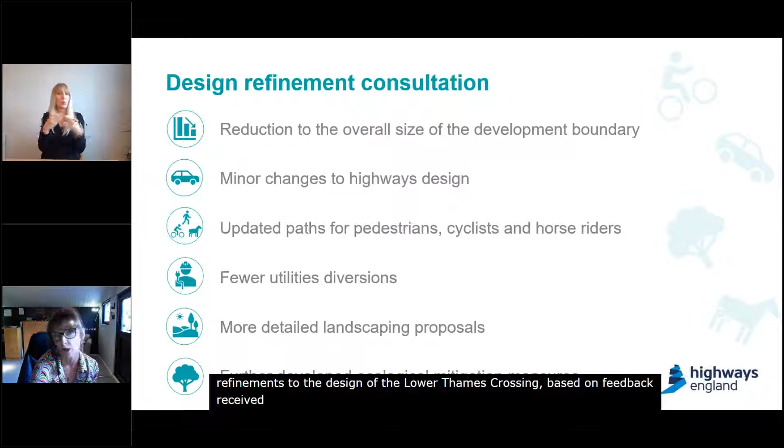We're proposing a number of refinements to the design of the Lower Thames Crossing based on feedback received during previous consultations, engagement with our stakeholders, and ongoing design work. We've now also got a better understanding of some of the technical constraints, including new information about existing utilities. The proposed refinements include a reduction to the overall size of the development boundary, minor changes to highways design, updated paths for pedestrians, cyclists and horse riders, fewer utilities diversions, more detailed landscaping proposals, and further developed ecological mitigation measures.

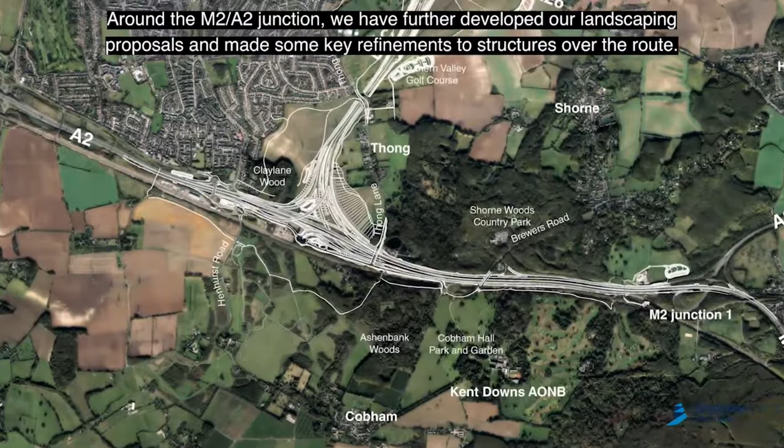Around the M2-A2 junction, we further developed our landscaping proposals and made some key refinements to structures over the route. Over the A2, Brewers Road and Thong Lane, green bridges would be slightly realigned to combine green spaces at each location and provide better connectivity for the landscape, ecology and habitats.

We're proposing a new electricity switching station at Thong Lane. This would be required to distribute electricity to all new and existing smaller substations along the Lower Thames Crossing route. The position of the Lower Thames Crossing to the south of Thong Lane would also be raised between 2 and 3 metres to improve driver visibility.

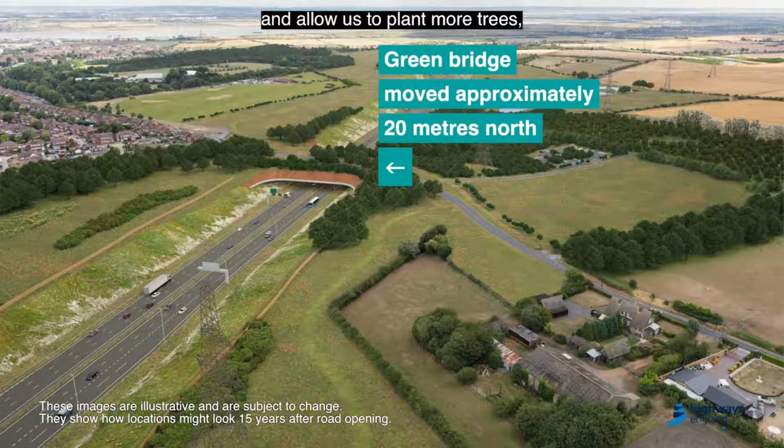Thong Lane Green Bridge over the Lower Thames Crossing would also move approximately 20 metres north to avoid clashing with a proposed gantry and allow us to plant more trees, something that was previously restricted by overhead electrical cables. The bridge would also be raised by less than half a metre due to the Lower Thames Crossing carriageway realignment.

We're proposing a new informal parking area to the east of Thong Lane. This would help ease the current parking issues along Brewers Road and help increase capacity for those visiting Shorne Woods Country Park. We've also refined and updated our proposals for new walking, cycling and horse riding paths in the vicinity of the Lower Thames Crossing.

We've carried out detailed noise assessments and have identified locations along the route where noise barriers could be used to reduce the sound of traffic for local communities. Further details on these proposed locations of the noise barriers can be found in our consultation documents and maps online and in our virtual exhibition.

These are just some of the design refinements we're consulting on. To view and comment on all the latest proposals, please visit the Lower Thames Crossing website, explore our online exhibition, and of course follow us on Facebook and Twitter for updates.

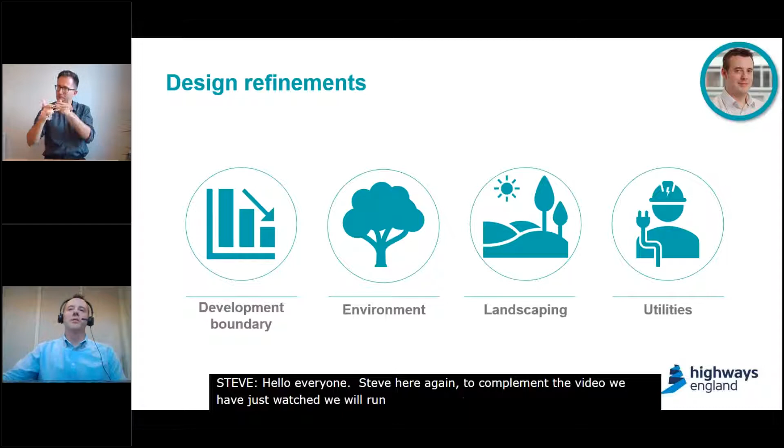We'll start off by covering some key themes regarding the development boundary, environmental impacts, landscaping and utilities. Then we'll dive into the refinements on a junction by junction basis, starting with the development boundary.

On screen now is the development boundary map. We've been able to reduce the amount of land required by 12.5% by refining and designing the utility diversions in some areas along the route. Within this revised development boundary, there's now some additional land that would be required permanently, whereas other areas, like construction sites, will only be needed temporarily, with any land being reinstated and returned to its owner once construction is complete.

If your property is affected by the scheme, you should have been written to already. If you have received a letter, please feel free to give us a call to discuss it on 0300 123 5000. That's 0300 123 5000.

Okay, on to environmental impacts now. Following feedback from our supplementary consultation, we've been able to refine the land required for utility diversions shown at supplementary consultation, and in doing so, we've been able to reduce the impacts to various wooded areas, particularly in the areas around the M2 and A2 junction.

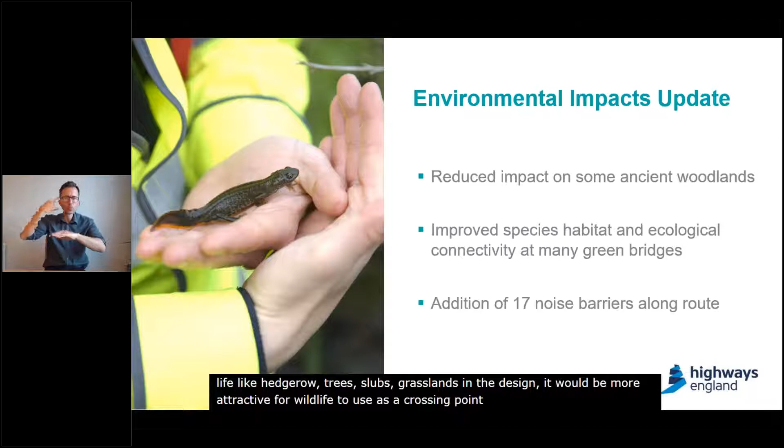And finally, noise barriers. To help mitigate noise, we've introduced some noise barriers in areas where higher noise levels and disturbance are anticipated.

Onto landscaping. As we've progressed the design of Lower Thames Crossing, we've also developed more detailed landscaping proposals to mitigate the visual impacts of the project's above ground infrastructure. Since supplementary consultation, we've added more detail on the specific type of ecological mitigation proposed across the route, such as grassland, woodland, and further refinements around watercourses. We also provide updates on new landforms and some proposals for new viewpoints.

Turning now to utilities, we've continued to refine our proposals for utility diversions across the route and are now proposing some further changes to the position presented at supplementary consultation. Some of the more notable updates include the need for small substations along the route, as well as a switching station near Thong Lane Green Bridge over the A2, which I believe Sarah pointed to earlier in her presentation.

The substations will be approximately 3 meters wide by 3 meters long and about 2.5 meters in height. The number and location of these substations will be confirmed following further design work and continued engagement with our stakeholders.

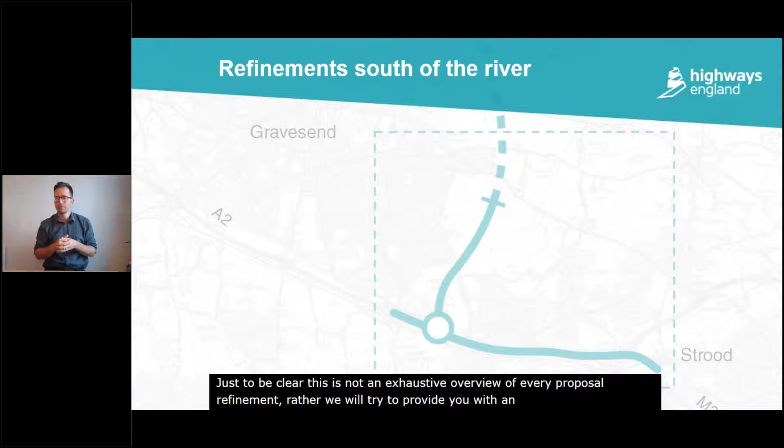Okay, let's now dive into some of the refinements south of the river. Just to be clear, this is not an exhaustive overview of every proposed refinement. Rather, we're going to try and provide you with an overview of some of the more notable refinements made to our proposals since we last consulted at supplementary consultation earlier this year.

On the screen right now is an image depicting the M2/A2 junction as we presented it at supplementary consultation. Now we'll show what we're proposing for this design refinement consultation, and we'll switch between the two, so hopefully you can see the differences.

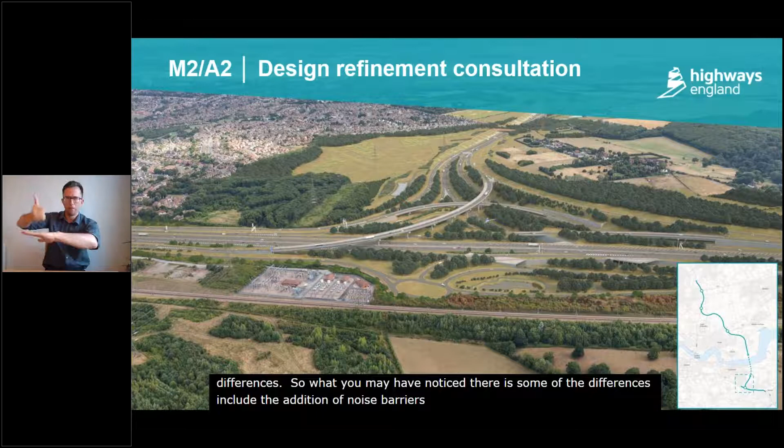What you may have noticed there is that some of the differences include the addition of noise barriers, a change to utility diversions, and, probably more notably, changes to our planting proposals. We'll go into that in more detail next.

Moving now to Thong Lane Green Bridge over the A2, the green space is just out of view on this image, but the green space will be amalgamated on one side of the bridge to improve the landscape and ecological connectivity.

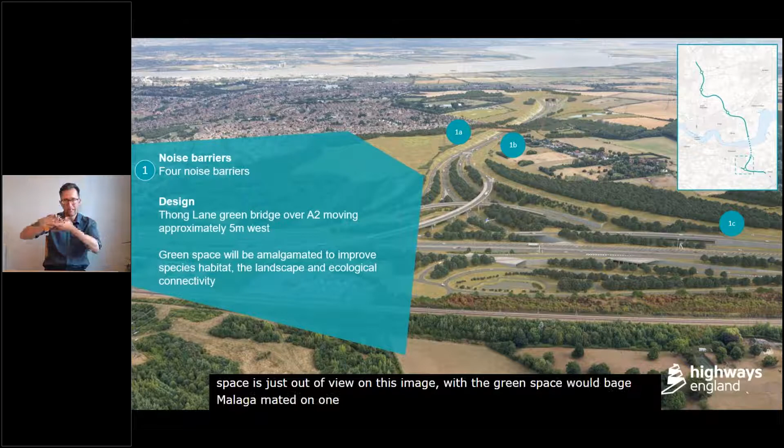Due to utility diversions required within Clay Lane Wood, the ancient woodland compensation in this area will be reduced, and as a result, we would increase the proposed ancient woodland compensation planting to the north on the edge of Gravesend as much as is reasonably practical. Landscaping in Brewers Wood and Great Crabbles Wood areas would be designed to connect both woodlands and propose replacement open space land.

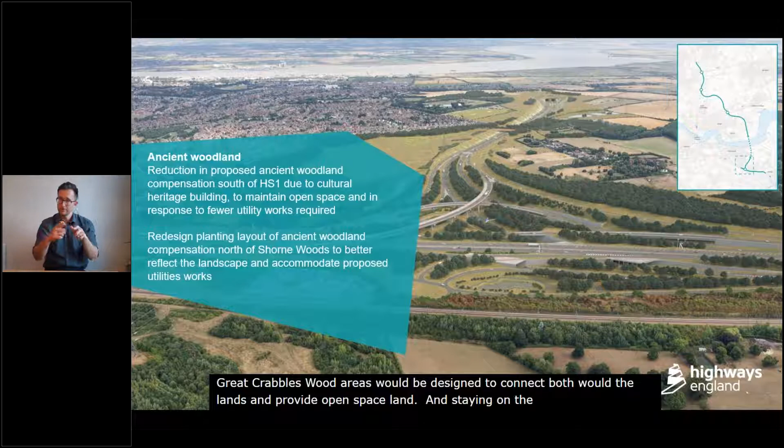Staying on the subject of woodlands, at Shorne Woods we've redesigned the block planting layout to better reflect the landscape and accommodate the proposed utility works. We've also reduced proposed ancient woodland compensation to the south of High Speed 1 railway due to a cultural heritage building and to maintain open space setting. This is due to the fact that fewer utility works are now planned in this area.

Moving on to utilities, a new switching station is required to distribute electricity to all new and existing smaller substations along the Lower Thames Crossing route. We're currently working with the utility company on the final design that we submitted as part of our development consent order application.

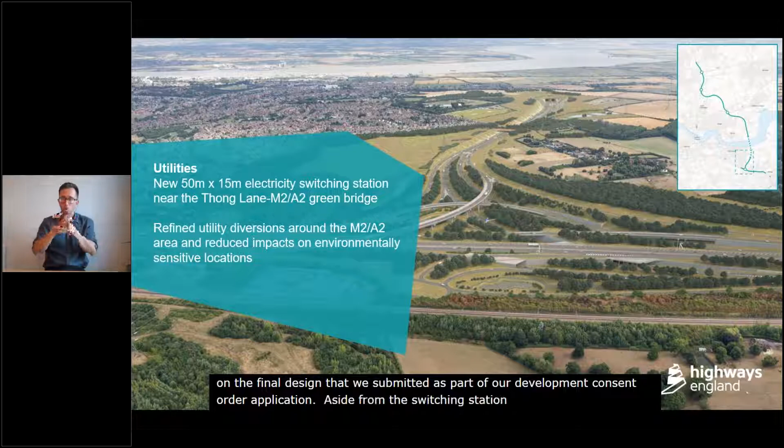Aside from the switching station in this area, there are also a number of proposed overhead power line diversions and upgrades in the area of Riverview Park and Thong Lane, as well as a short extension to a gas diversion along Valley Drive. We've been working with our stakeholders, including utility companies, to refine our proposals and minimise the land required for works. This in turn reduces impacts on environmentally sensitive locations.

So now we'll take a particular focus on refinements made in the Thong Lane Green Bridge area. This is over Lower Thames Crossing.

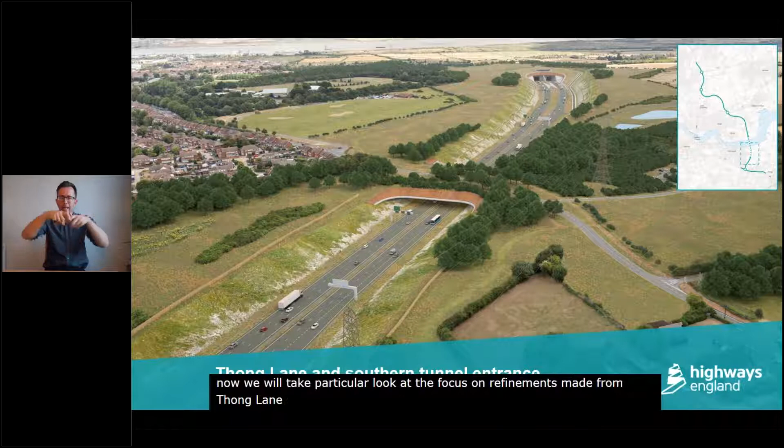In terms of design, Thong Lane Green Bridge over Lower Thames Crossing is moving 20 metres north to avoid clashing with the proposed gantry and to allow for tree planting that was previously restricted by overhead power lines. The bridge would also be raised by around half a metre as a result of an alignment change. You can see this represented by point 1 on the image.

We're also proposing that Lower Thames Crossing will be raised south of Thong Lane Green Bridge to improve driver visibility. This is shown as point number 2 on the image.

Moving on to utilities in this area, as shown on the image as point 1, we plan to have a substation located behind the southern tunnel entrance. Our landscaping proposals around this substation will help to integrate the infrastructure into the existing landscape and to mitigate the visual impact.

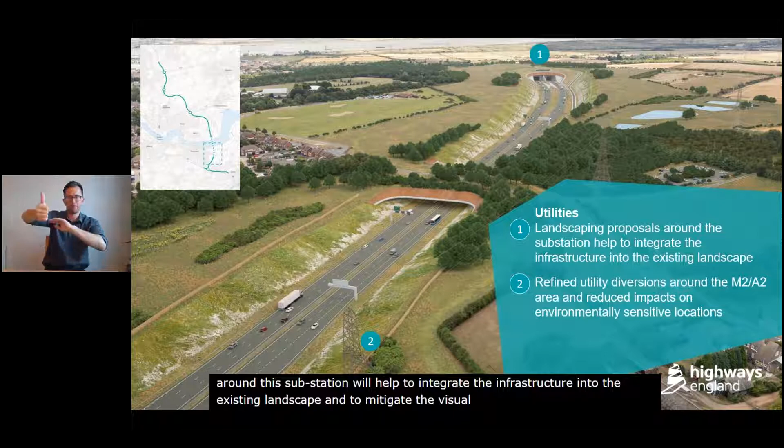We've also refined utility diversions in the area, as shown by point 2. Due to the proposed changes to Thong Lane Green Bridge over Lower Thames Crossing, we're seeking to move the overhead power line diversions in this area by around 235 metres to the south. This means it will move away from Riverview Park and closer to Thong.

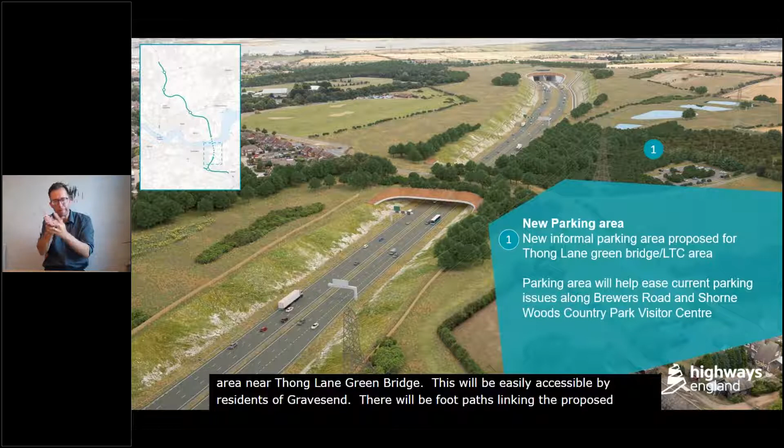As shown as point 1 on this image, we've added a new parking area near Thong Lane Green Bridge. This will be easily accessible by residents of Gravesend. There'll be footpaths linking the proposed parking area to Shorne Woods. The new paths remain as shown in our proposals at supplementary consultation, which you'll see in the subsequent slide.

Taking a look at changes to paths in the area, as a result of the Thong Lane Green Bridge over Lower Thames Crossing moving 20 metres north, the shared path on this bridge has also moved, and this is reflected on the map in purple colour.

So I'm just going to recap now on the refinements we've just covered. The map on screen is also included in your guide for those of you who've got it, on pages 26 to 27 and 28 to 29 of the Design Refinement Consultation Guide.

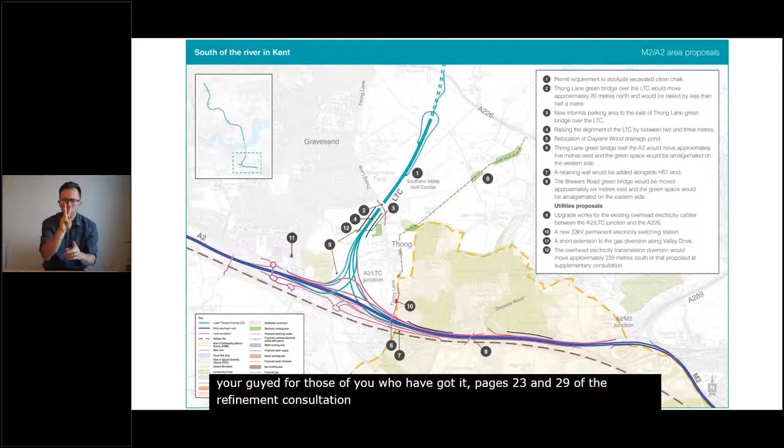Number 2 on screen is the Thong Lane Green Bridge over Lower Thames Crossing, which has moved 20 metres north. Number 3 is the informal parking area to the east of Thong Lane Green Bridge. Number 4 shows where the alignment of Lower Thames Crossing has been raised south of Thong Lane Green Bridge over Lower Thames Crossing.

Points 9 through to 12 help to show the utility upgrade works for existing overhead power lines. Point number 10 shows the location of the proposed new 33 kilovolt permanent electricity switching station off Thong Lane near the M2/A2.

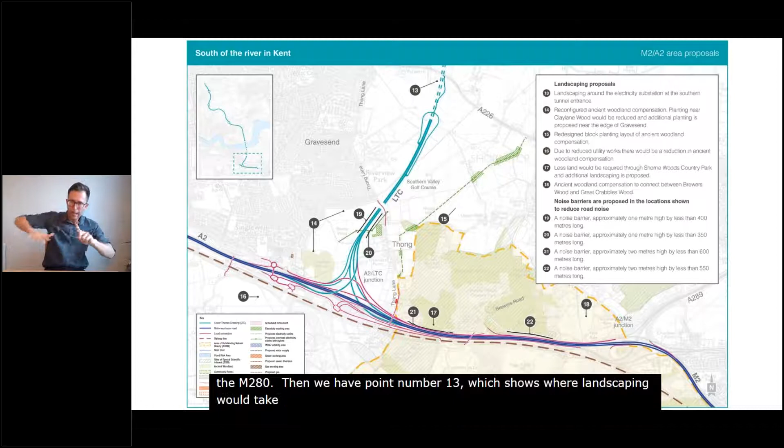Point number 13 shows where landscaping would take place around a proposed substation. Points 14 through to 18 help to show where we're proposing to reconfigure woodland compensation. Finally, points 19 through to 22 show where we propose to place some noise barriers as part of our noise mitigation strategy.

Thank you, Steve, for that run through of the proposed refinements to the route. As was mentioned at the very start of this webinar, our goal today is to provide you with an overview of some of the more notable refinements made to our proposals since our last supplementary consultation.

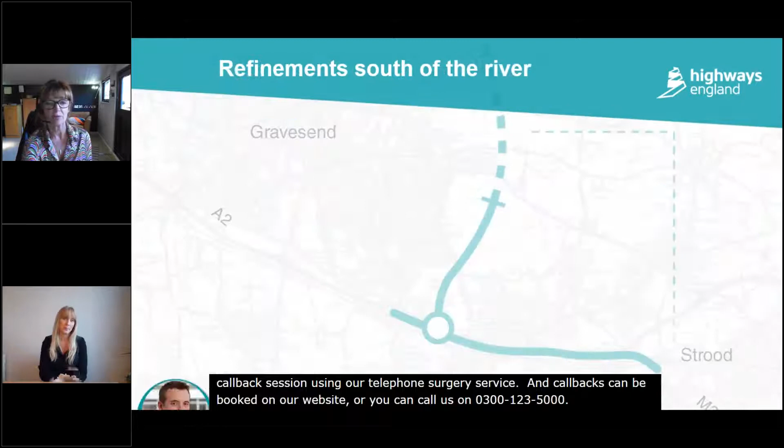Okay, so we're going to be focusing today's Q&A session on areas of the Lower Thames Crossing proposals that are south of the river. We're going to begin with our first question, and we've had a couple of questions come in about the changes in the refinements in the Thong Lane area. Steve, this might be one for you: why has LTC been raised up where it crosses Thong Lane?

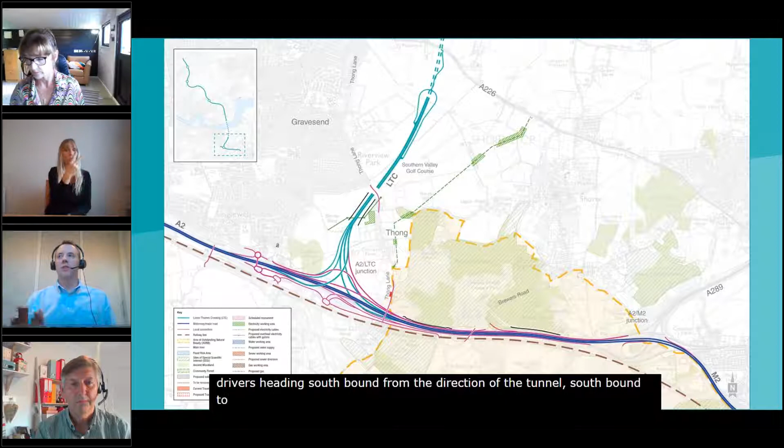Okay, yeah, sure, I'll take that. It's principally to improve visibility for drivers heading southbound from the direction of the tunnel, southbound to join the A2. It's to improve the vertical alignment and the forward visibility for drivers. So the road LTC will still sit within quite a deep cutting at this point, and there will also be some noise barriers alongside Lower Thames Crossing for that stretch of the route.

And there's another question connected to this one: why has the Green Bridge been moved further north? This person has asked — they're concerned about it opening them up to more noise and air pollution, they're saying. Right, sure, yeah, it's interconnected.

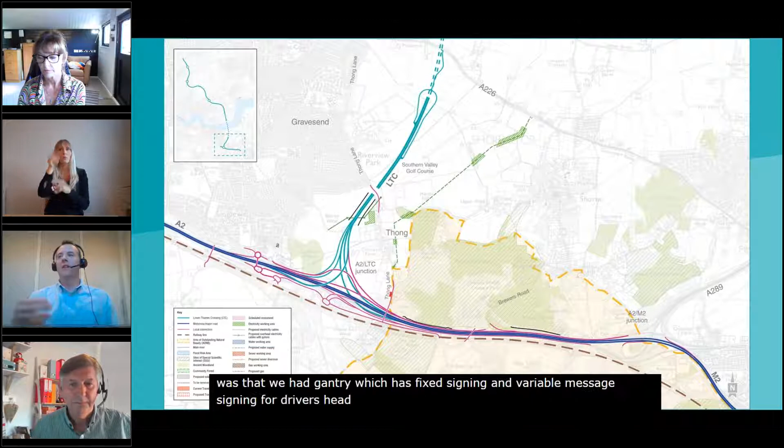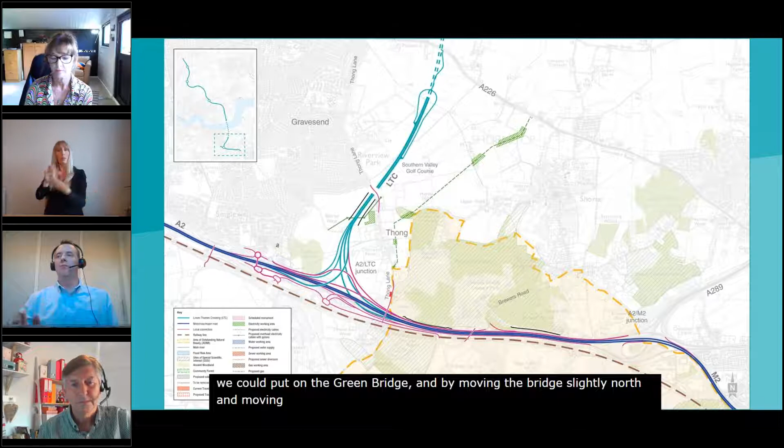So one of the main reasons was that we had a gantry with fixed signing and variable message signing for drivers heading northbound towards the tunnel, and there's a set distance back from the tunnel that the gantry has to be. Unfortunately, it was very close to the position of Thong Lane Green Bridge, so we decided to move the Green Bridge. That also helped us with the alignment change I was just talking about, so there was a benefit there. The other benefit it gave us was it allowed us to reconfigure the power line diversion, which was previously restricting some of the planting we could put on the Green Bridge. By moving the bridge slightly north and moving the power line diversion south, it enabled us to provide better planting on the Green Bridge itself. So there were a number of benefits, and the two issues were interlinked: the visibility for the alignment change, and moving the bridge for the gantry.

Thank you for that, Steve. Clearly, some of the refinements in the Thong Lane area are attracting some interest.

Gary, we've had quite a few questions about the parking area on Thong Lane, asking why it's needed, who's going to look after it, and who's responsible if there are things like fly tipping or trespassers. Gary, can you help with that?

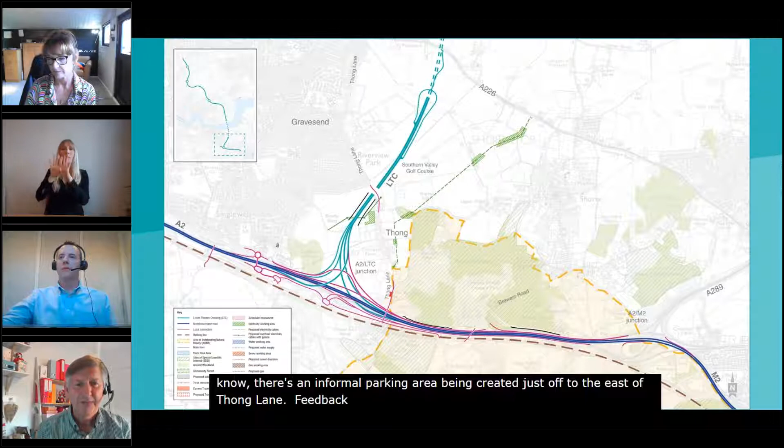Yes, of course. As we pointed out in the video earlier, there's an informal parking area being created just off to the east of Thong Lane. Feedback from stakeholders told us about particular parking issues on Brewers Road, so we thought this was an opportunity to help out with access to Shorne Woods Country Park and the visitor centre. The parking area will provide another point from which to explore the local area.

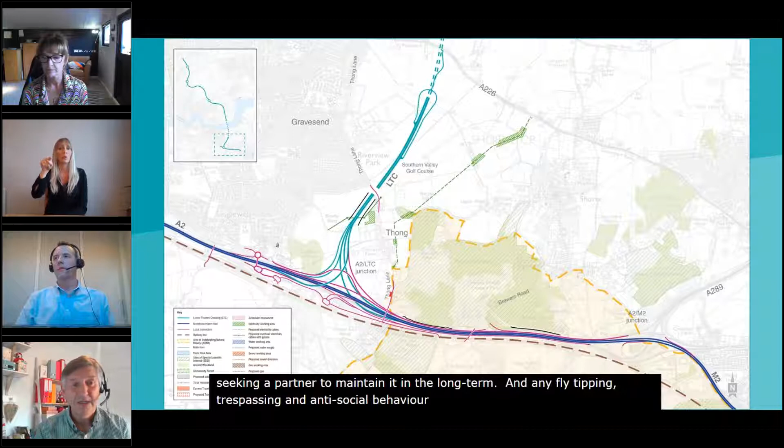The intention is that it's going to have around 50 car parking spaces. It'll initially be owned by Highways England, but we will be seeking a partner to maintain it in the longer term. Any fly tipping, trespassing, or antisocial behaviour should really be reported to Gravesham or Highways England - that's how we're looking at it being managed initially. It will be an informal area, designed not with tarmac but with gravel, being sympathetic to the area it's set within.

Thanks for that, Gary. We've had a question come in, which I might answer. It's about working and social practices that have emerged from the COVID-19 pandemic changing everybody, including easing some of the traffic flows on other Thames crossings. We're being asked whether that's going to change any of the economic benefits that the Lower Thames Crossing might bring, and asking, is there a budget for the works that the public can see?

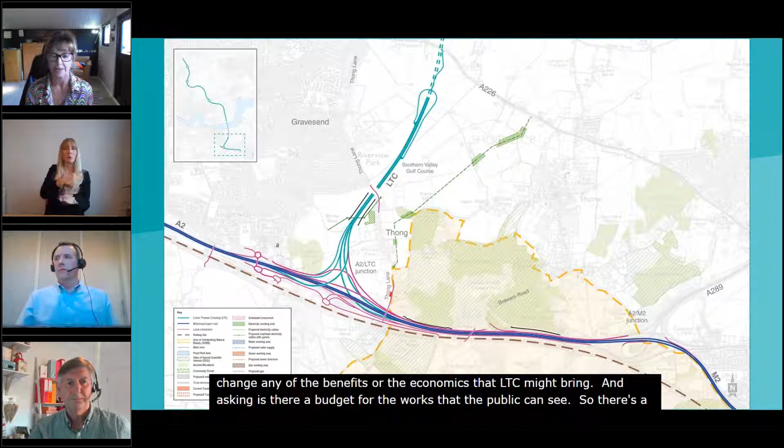There's a couple of things I can probably help with there. We know COVID has had a huge impact, and it's had an impact even on the way we're consulting at the moment. Some of the impacts on traffic levels have been a short-term, quite significant impact, but it's one we foresee changing and returning to normal over time. The Dartford Crossing is still the only way of crossing the Thames east of London, so COVID or no COVID, there's still a very strong business case for building the Lower Thames Crossing, which will almost double road capacity across the Thames east of London, creating that new connection and bringing economic benefits to both Kent and Essex and beyond.

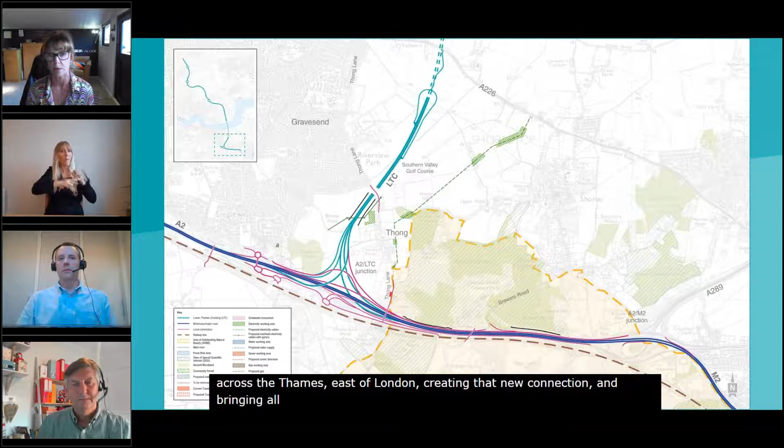In terms of funding, the development phase of this project, which is the phase we're in at the moment, is fully funded. What happens then, and this is completely normal, is we will seek full funding once we get permission to build the crossing. So I hope that helps the person who asked that question.

Steve, I think there's a question come in now which perhaps you might be able to help with. Someone said they've got a general interest in the success of the scheme and also its impact on the local environment and its wider transport implications. Is there some more detail you can add around that, Steve? Okay, sure. Well, yeah, thank you for your interest.

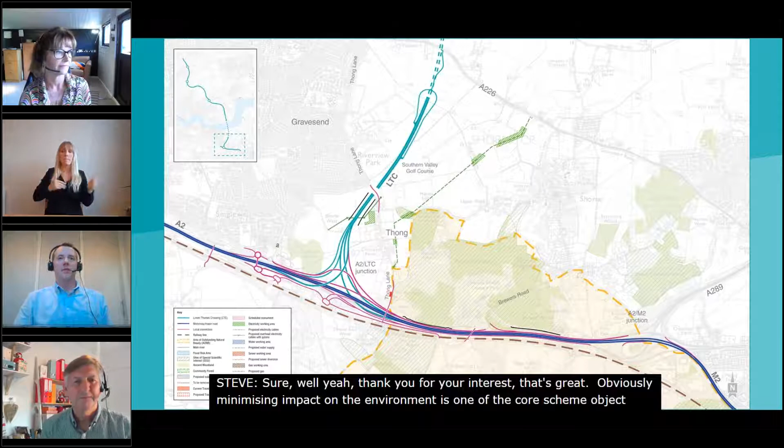That's great. So obviously minimizing impact on the environment is one of our core scheme objectives. There's quite an extensive update on the environmental impacts, which is on our website.

So if you're particularly interested in the environmental side, there's quite a lot of information there specifically pertaining to this design refinement consultation. Some of the highlights, I suppose - reduced impact on Shorne and Ashenbank Woods by refining our plans for utility diversions. That's quite a key theme, improvements and more refinement in our utility proposals, which has had some positive benefits to the environmental impacts.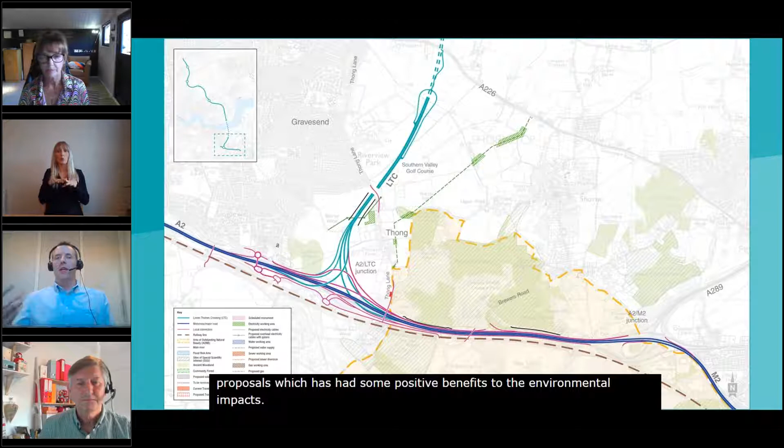Better connectivity for non-motorised users, so for walkers, cyclists and horse riders - there's been some enhancements in our proposals there. And some better definition on planting and landscaping proposals, and noise barriers. We haven't previously consulted on noise barriers, but we have got some more information to share on those now. So there's quite a lot in the environmental arena, and yeah, thank you again for your interest.

Thanks, Steve. Gary, a question for you now. Quite a local question from the Cobham area, asking how will these changes affect the Cobham parish, the boundaries of which stretch all the way to Ifield, Meopham, and Luddesdown. Can you explain how the changes might affect those places like Luddesdown and Cuxton?

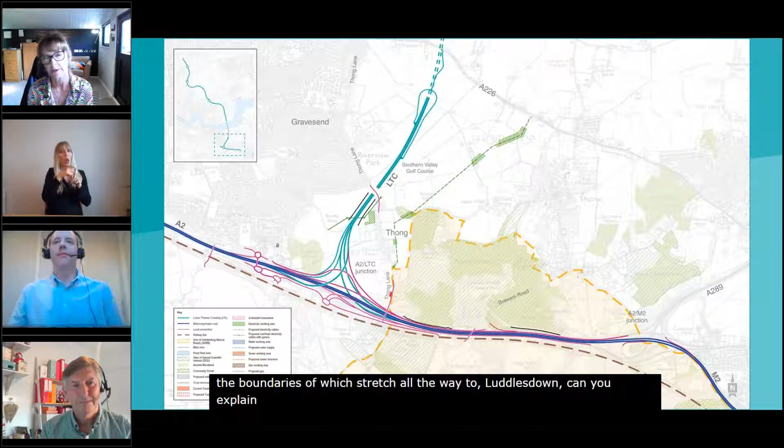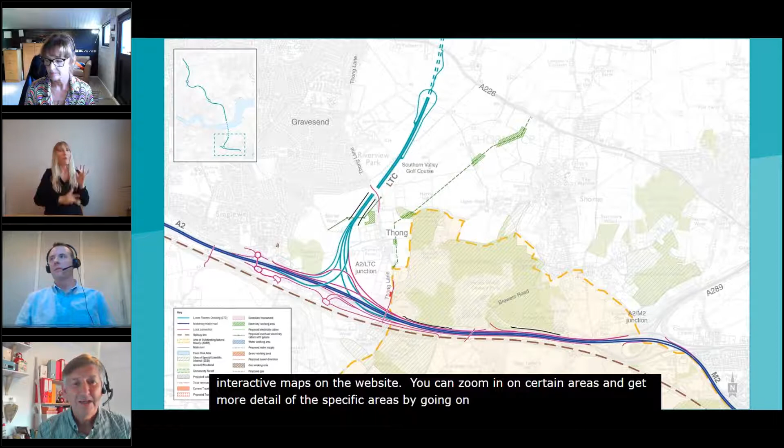On the south side of the HS1, one of the biggest things we've done is reduce the temporary land take because of the work we've done with the utility companies. We've most probably covered some of these points already in the webinar, but please do look at the guide, particularly the interactive maps on the website, where you can zoom in on certain areas and get more detail. None of the refinements in this consultation have had any different impacts to what we had at supplementary consultation, particularly at Luddesdown or Cuxton.

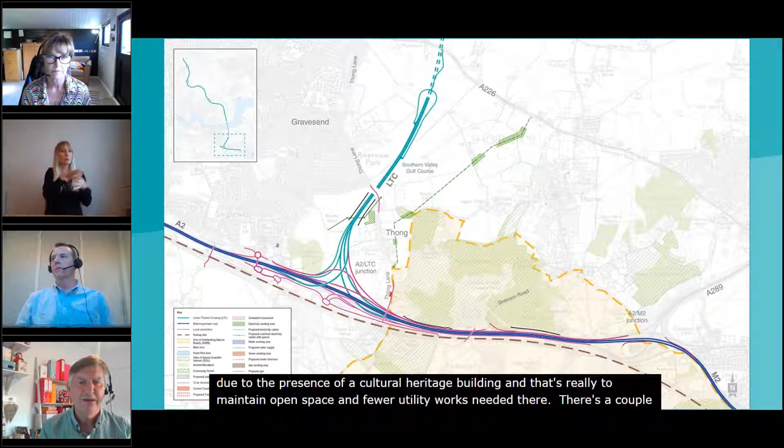South of the high speed line, we've reduced the ancient woodland compensation near Henhurst Road and Church Road due to the presence of a cultural heritage building, to maintain open space and reduce the utility works needed there. There's also a couple of substations near the common service area, 3 metres by 3 metres in size, within an area of 5 by 4 metres. Overall, south of HS1, there have been a lot of improvements because we've got a lot less utilities and temporary land take.

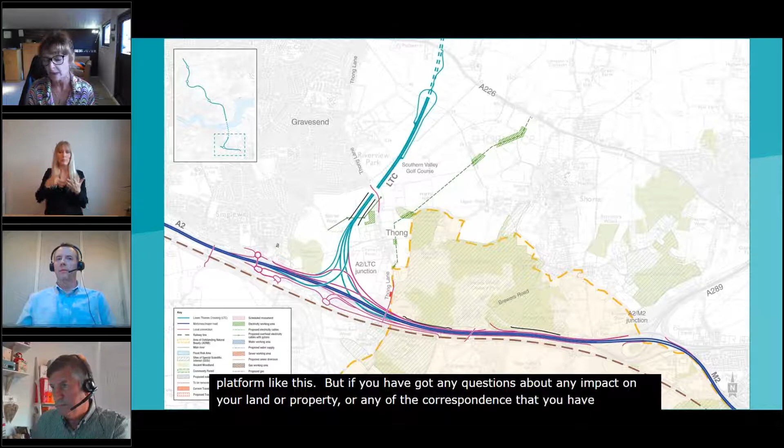We've had a couple of questions about land and property, but we can't answer those individually, for reasons of confidentiality — we don't want to discuss individual cases in a webinar platform like this. If you have any questions about impact on your land or property, or any correspondence you've had from us, please get in touch using our telephone surgery service. You can book that on our website, and the exhibition has all the details. You can email us at info@lowerthamescrossing.co.uk, or call us on 0300 123 7000. We have a dedicated land and property team who have all the details at their fingertips and should be able to answer your questions. Thank you to everyone who's asked about land and property.

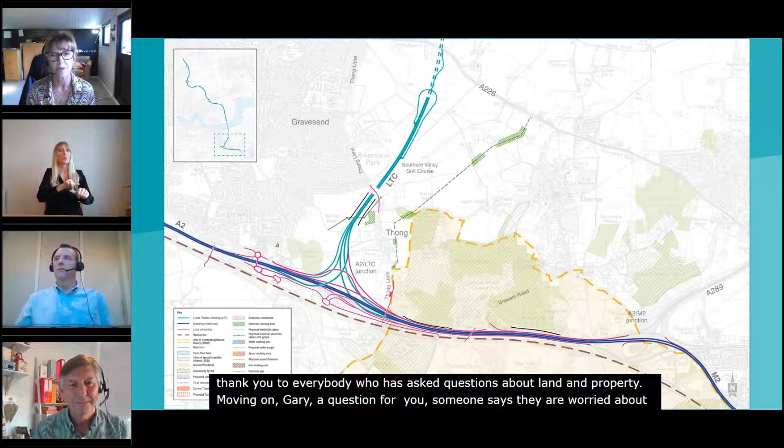Moving on, Gary, a question for you. Someone says they're worried about changes to their routine journeys on this side of the river — what difference will some of these changes make?

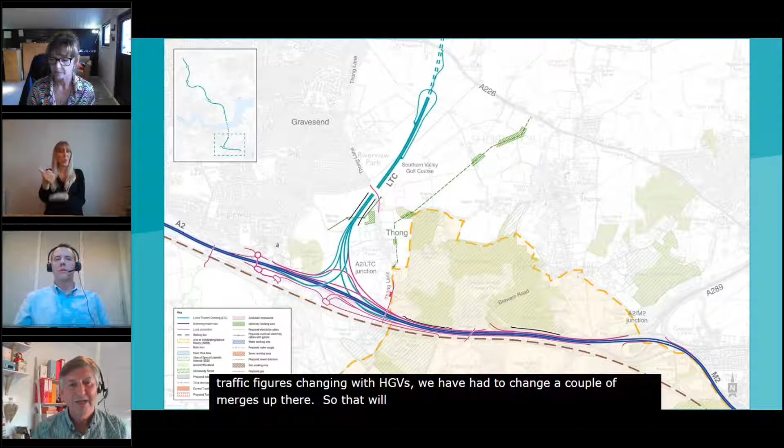But the best thing to do, if it's a specific journey you're looking at, would be to arrange a callback so we can go through that particular journey in detail and get someone to explain exactly what the difference would be.

I think it's worth pointing out that as we progress towards the construction phase of this scheme, any impacts on the local network will be communicated to communities. We'll work closely with local authorities to minimise the impact on everybody's day-to-day journeys, though we understand a construction project like this is bound to have some impact on those journeys.

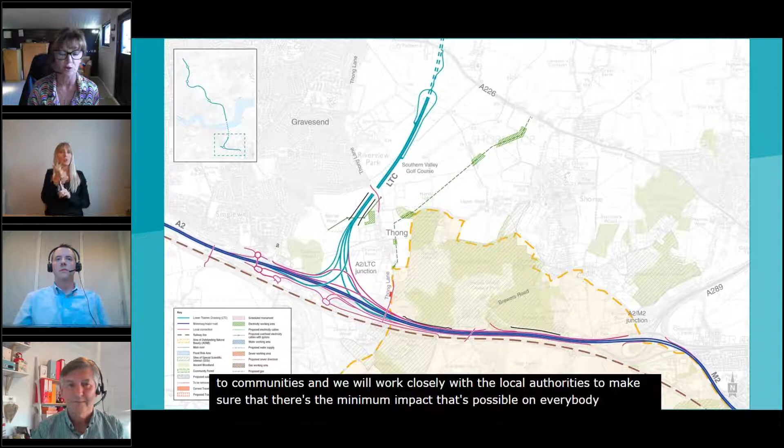Gary, another question here for you, this time about Dartford and about tolls. Can you confirm whether tolls will be the same as for the Dartford Tunnel, and whether motorcycles will remain free 24/7? There's also another question connected to that.

Why are you excluding L-plate learner motorcyclists? They're allowed apparently on the Dartford Crossing, so why the difference here? Gary, can you pick that up?

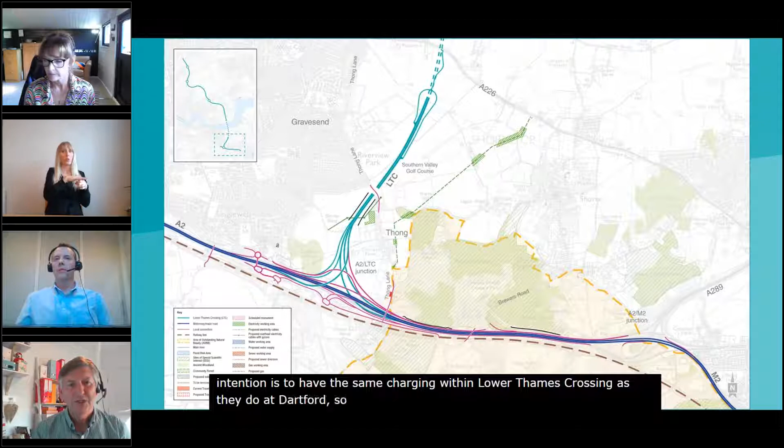Yeah, the charging regime will replicate the approach applied at Dartford. The intention is that Lower Thames Crossing will have the same charging as Dartford. For local areas there will be reduced charging, and motorcyclists will be able to use the crossing free, the same as Dartford.

The motorcyclist - it'll most probably be lower speed motorcycles that we'll restrict on the LTC, because it's a 70 mile per hour through a 7.3 kilometre tunnel, whereas Dartford has a lower speed limit at 50 miles an hour. So I think there will be restrictions, but for specifics on this I'd recommend a call back to speak to one of our operational team.

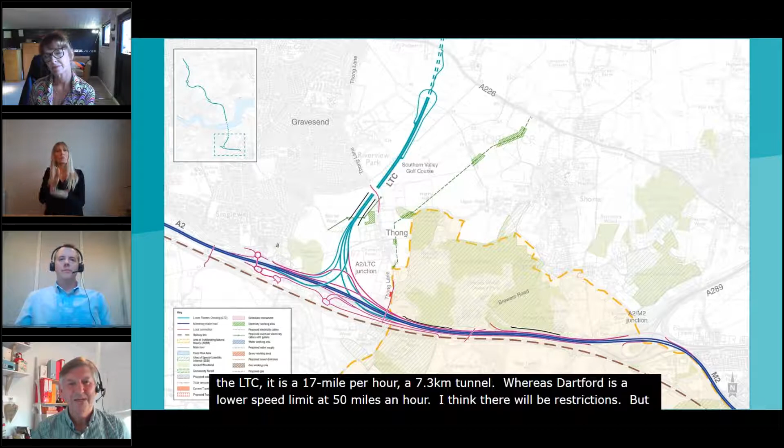There will be restrictions. We are planning to put restrictions on going through the tunnel, because it's 7.3 kilometres, and we don't want the highest speed, 70 mile per hour vehicles mixing with lower speed traffic, cyclists, horse riders, and those sorts of things. So there will be prohibitions within the crossing, and it's ultimately done in the name of safety.

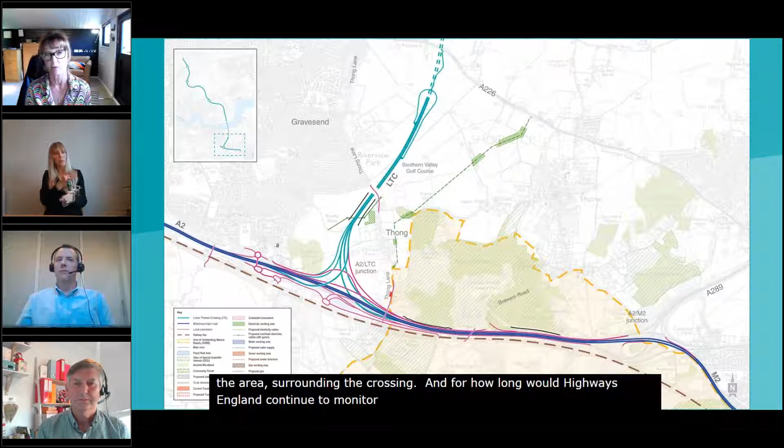Thank you, Gary. Another question has come in now about the environment - whether we've got an accurate record of the current wildlife distribution in the area surrounding the crossing, and for how long would Highways England continue to monitor after construction in order to assess the impact the road and its construction has had on environmental mitigations and the effectiveness of the proposed refinements.

Steve, is that one you could pick up? Yeah, sure. Yes is the answer. We have extensive surveys of current wildlife, both in the south and the north. That information has been shared with relevant stakeholders, and certainly all that information will also be available as part of our development consent order submission later this year.

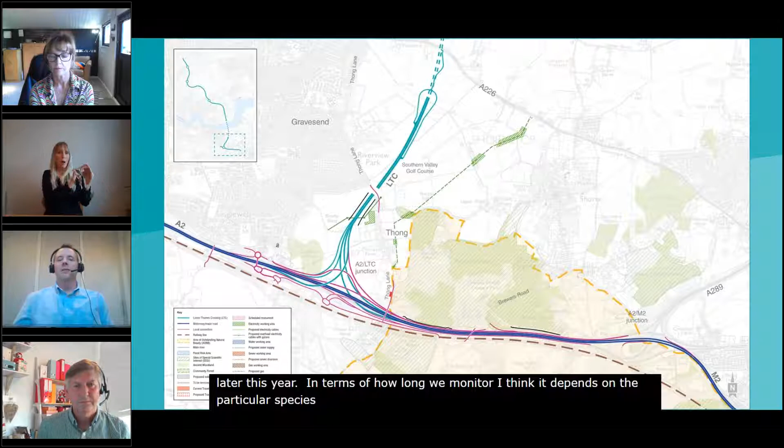In terms of how long we monitor, it depends on the particular species, habitats, etc. But to give an example, for bats the plan is to monitor at various intervals for something like the first 10 years post-construction. So yes, the monitoring and surveying of wildlife is quite extensive.

Thank you for that, Steve. And I think it's worth pointing out that as we go towards submitting our development consent order application, a lot of that information about impacts on the environment will be clear for people to see, along with the results of all the work that's been done to look at how we can minimise those impacts.

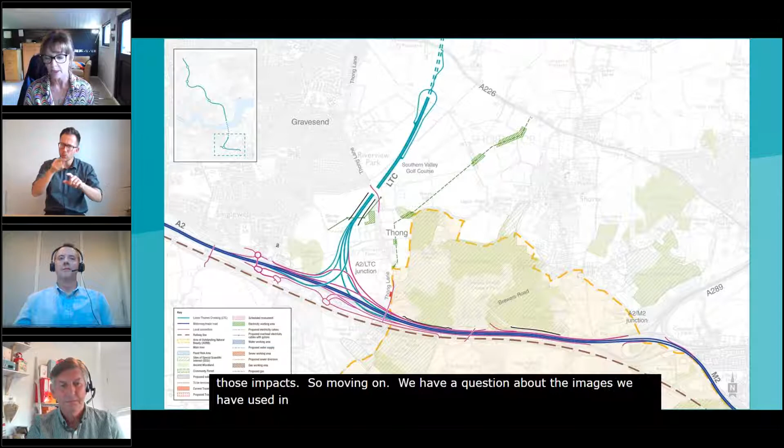So moving on, we have a question about the images used in today's webinar and in the other consultation materials - how they depict what the area is going to look like 15 years after completion. This person asks that those on whom this has an immediate impact want to know what it's going to look like at completion, saying some people won't be around to wait to see what it looks like 15 years later. Steve, is that something you can help with?

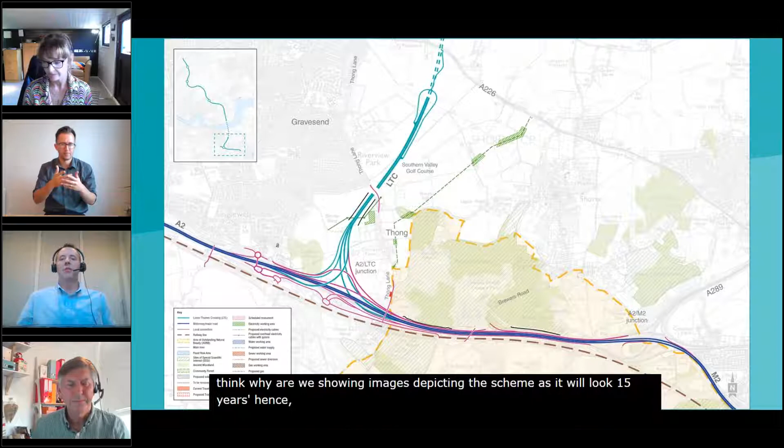Yes, well, I hope they will be around to share the benefits of the project. I think the reason we're showing images depicting the scheme as it will look 15 years hence is for consistency with what we've previously shown in previous consultations, so that you can compare like with like.

Yes, we could have done some opening day images, but the intention really was to try and show the scheme as it will be once complete in the future, to allow principally the planting to fully grow. So the intention is to show what the final product is like once the planting has had time to mature. And so 15 years was what we decided to go with.

And that's a pretty standard way, isn't it, of presenting information like that across the industry? Yeah, I believe so. Thank you for that, Steve.

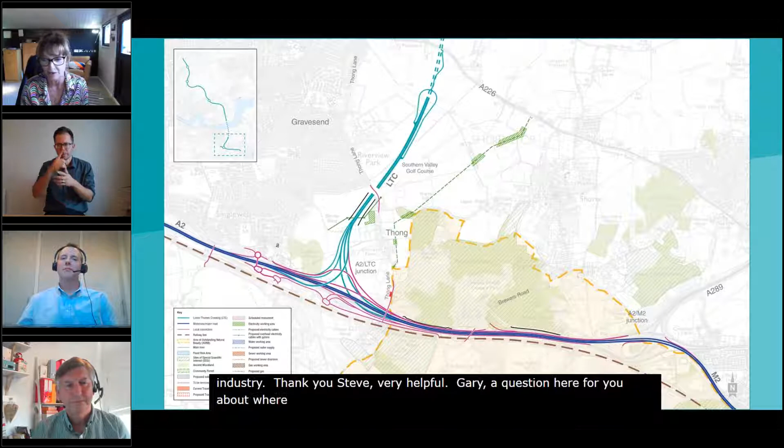That's really helpful. Gary, a question here for you - where is the excavated material in Kent going on the new scheme, as there seem to be very few places to put it now that viaducts are used? Is there an indicative volume of how much is going to be excavated in Kent, and the lorry movements that would be required to move it around, and which routes it's going to be moved on? There's also a supplementary question asking why there's a chalk storage area proposed.

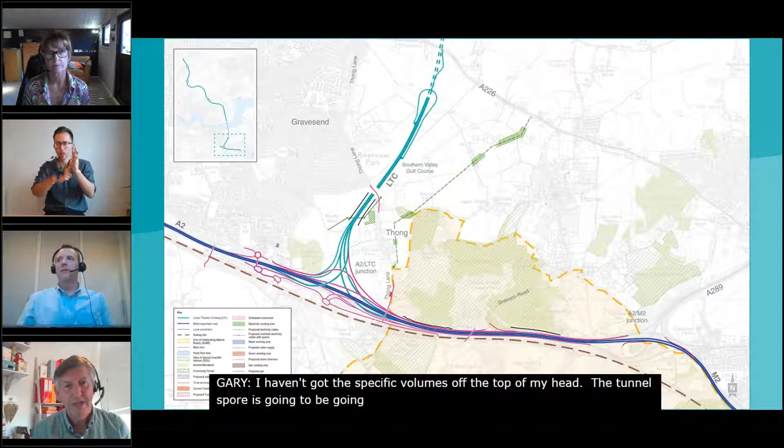I haven't got the specific volumes off the top of my head, but the intention is the tunnel spoil will go out of the northern portal and be distributed around it. On the south side, the spoil from the cutting, we'll try to reuse on site when and where possible, because it's more sustainable and cheaper for the contractor.

Any spoil material that needs to get off site would be transported to designated disposal sites by lorry, or alternative methods like river barges or rail.

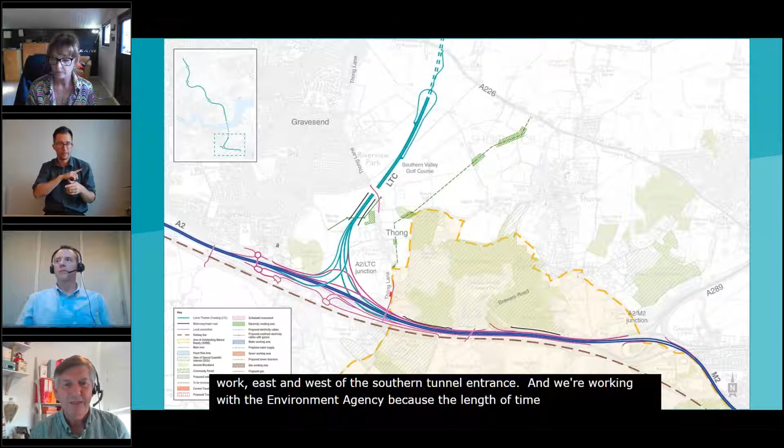We're exploring the opportunity to stockpile excavated clean chalk from our construction work east and west of the southern tunnel entrance, and we're working with the Environment Agency because the length of time the stockpile may be present means we may require an environmental permit, as it could be up to 3 years according to the guide. So we're working with them to get that in place.

We're also creating what we call Chalk Park, a landscape proposal around the southern portal, which will reuse some of the excavated material. It's just to the south of the A226, and any good quality material we can move into that area, that's what we will do.

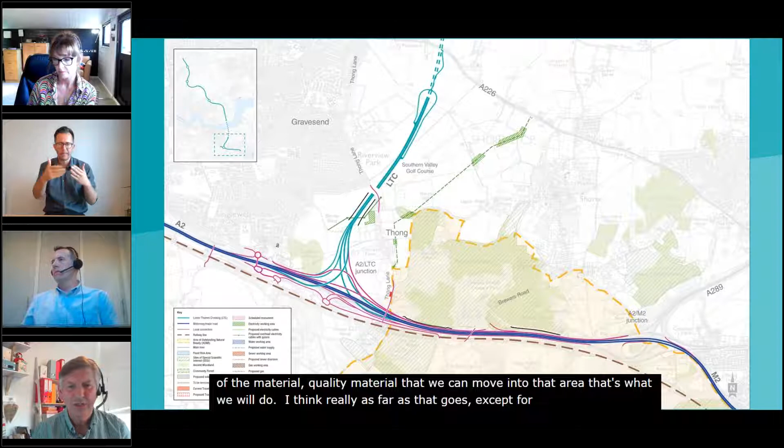I think that's most probably all I can say, except there was a document in the supplementary consultation earlier this year which gives more information about our plans on how we're going to build LTC. It would be useful if anybody goes back to that particular document.

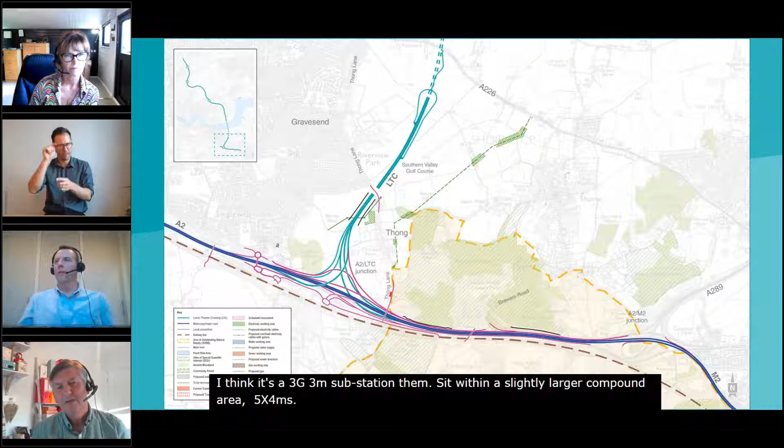I think we're talking about a substation here, aren't we? It's a 3 by 3 meter substation, sitting within a slightly larger compound area of 5 by 4 meters. I think that's the one referred to. If it's the one just north of the A2, the one pointed out on the video, I think that one is actually slightly larger, Steve - that is larger, if it's that one, which is a switching station.

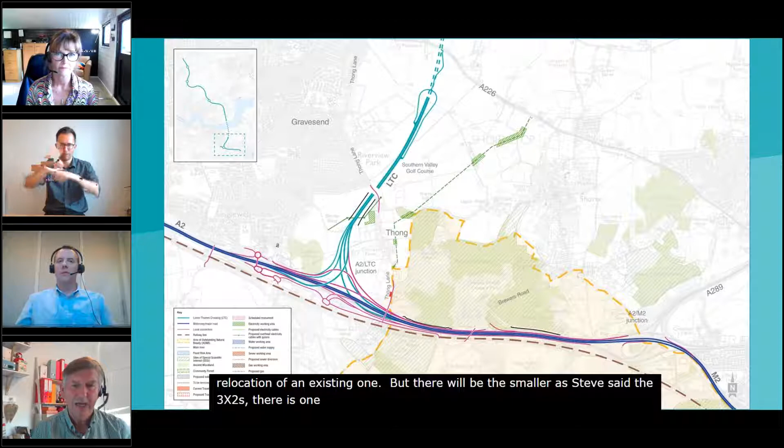Yes, that's right. The reason we've had to put it there is because in putting in the A2 junction, we've taken out the switching station there, so we've had to relocate it. It's a relocation of an existing one, but there will also be smaller 3 by 2 substations, including one just to the north of that, around the area that we'll be putting in.

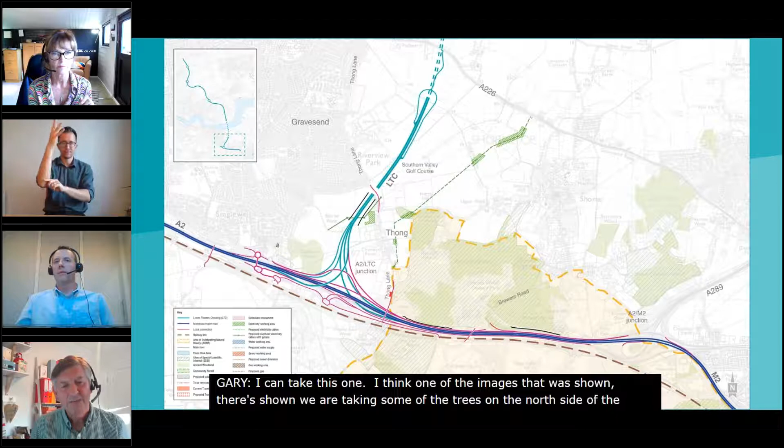Do you want to do that one, Gary? Yeah, I don't mind taking this one. What we've shown - in one of the images that was shown - we are taking some of the trees on the north side of the verge there, and it's because of the utility diversion route through there.

We had a supplementary consultation with a 65-meter corridor through there, but with more detail and speaking to the utility companies about what we can and can't do, we've actually reduced that down to about 35 meters. What we've shown in this particular image is the removal of trees within that corridor, but we'll be looking at reducing it even further and speaking to the utility companies, because there's ancient woodland along the top there, and it's an AONB.

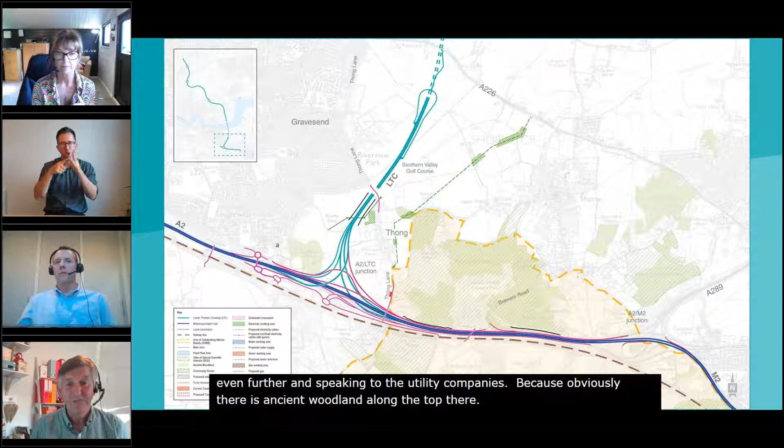So landscaping is one of the key elements we are consulting on during this consultation, and we would welcome any feedback on this at all. So please go and have a look at the site, the maps, and the guide.

Thong Lane has come up again, asking us, will raising the level of the Lower Thames crossing at Thong Lane result in gantries being visible in the landscape? I don't know which one of you feels best qualified to answer that one.

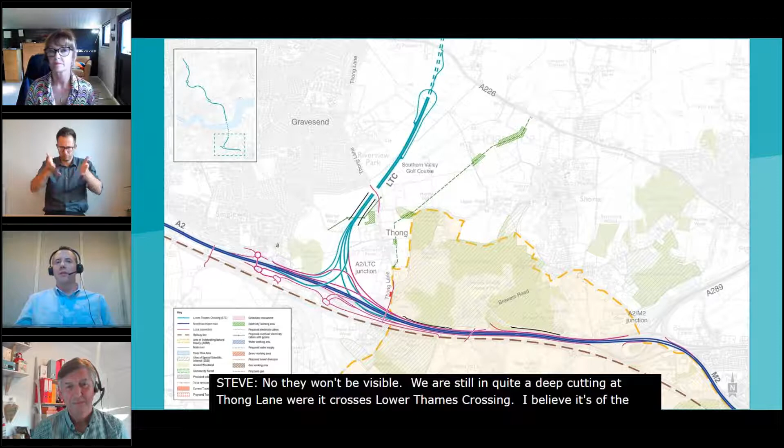No, they won't be visible. We're still in quite a deep cutting at Thong Lane, where Thong Lane crosses our Lower Thames crossing. I believe it's of the order of 8 to 10 meters, perhaps slightly more. But the Lower Thames crossing will still be in a relatively deep cutting at that point, so the gantry infrastructure should not be visible.

Thank you, Steve. Another environmental impact question here, saying that our environmental impact updates focus on the effect on the preliminary environmental information report, not so much, if at all, on the actual effect on the environment. What's your response to that? Who wants to lead on that one, Steve?

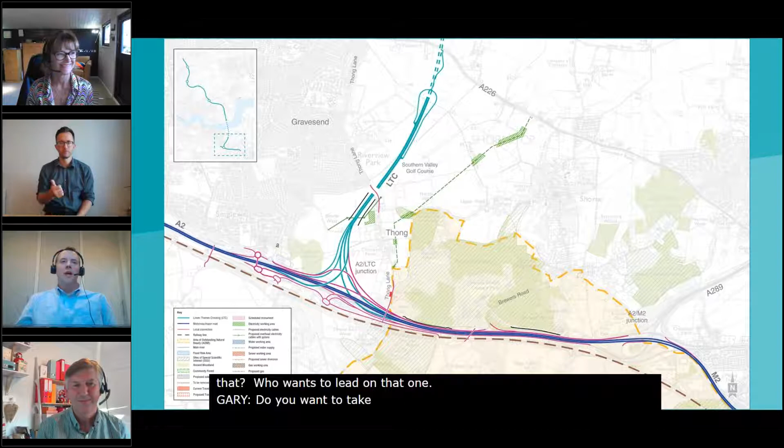Sorry, yes, environmental - I think you're right. I think if you're referring to the environmental impacts update document, perhaps it's that one that some of you have in your possession. Yes, it does refer back to the PEIR, but nevertheless, I think the environmental impacts are set out in quite a bit of detail in terms of the impact of the changes we're making. Does that help answer the question? Maybe it's worth signposting that more information will be available in the environmental statement when we submit the application, so maybe that will help.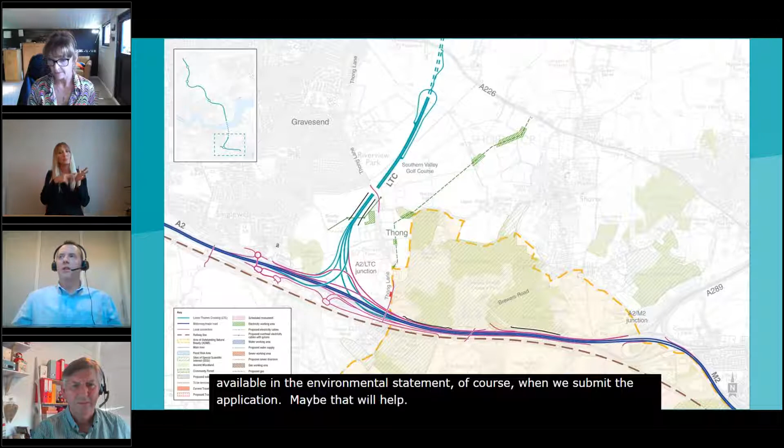Thank you, Steve. I think it's worth going back also to the summary design refinement guide, which is also available on the website. I think it does set the context of those impacts on the environment. I appreciate the more detailed update refers a lot back to the PEIR, but if you look in the design refinements consultation guide, you should see the context for those environmental proposal changes.

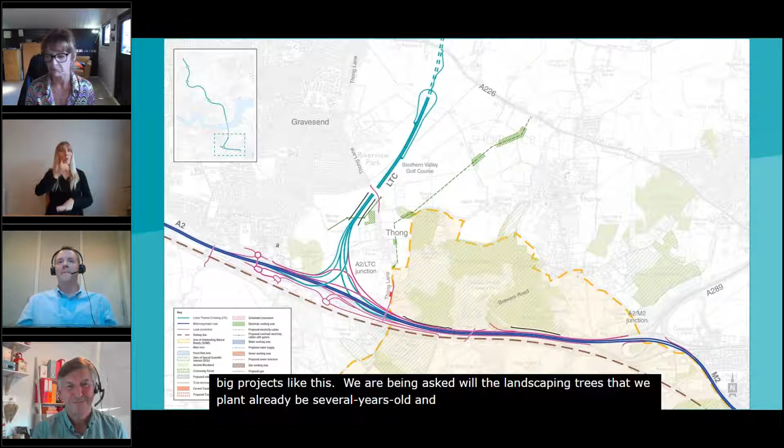Thank you. The next question is one that comes up quite a lot on big projects like this. We're being asked, will the landscaping trees we plant already be several years old and large when they're planted? Gary, I don't know if you're able to offer information on that.

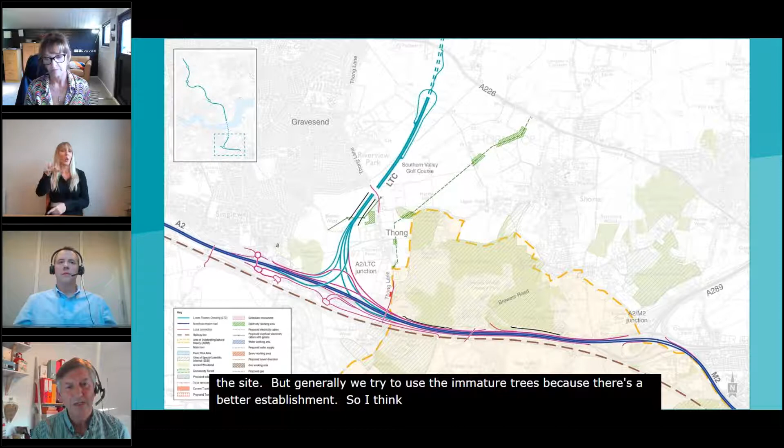Yeah, the tree planting proposal for the environmental mitigation would typically make use of immature trees, because transplanting larger and more established trees tends to be less successful. At sensitive locations, though, we would look at more mature trees if the assessment showed this would help significantly reduce the impact. So it really depends on the site, but generally we try to use immature trees because there's better establishment. It really depends on the location - we try to put the more mature trees in where there's significant impact.

Yeah, understood. And that's something we do across the industry, isn't it? Because, for that very reason, it is more successful to plant younger trees - they have a greater chance of becoming established and actually making the difference we want them to make.

I think we've got time for a couple more questions. One's just come in asking about concern regarding the land take north of the A2 alongside Shorne Woods, especially next to Park Pale. Which one of you wants to comment on that?

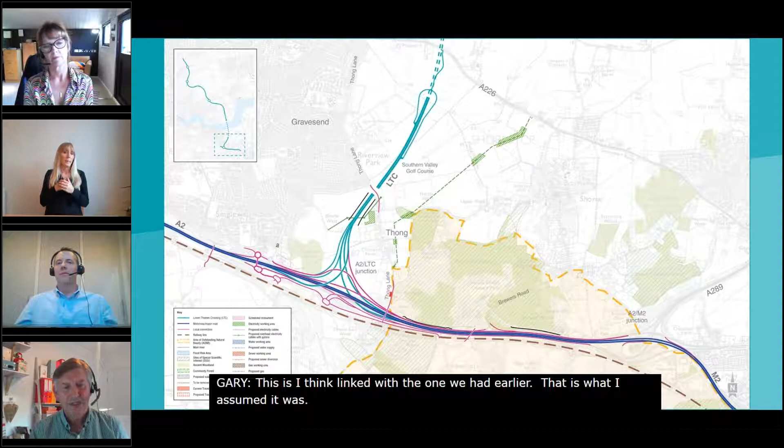Well, I think this is linked with the one we had earlier - that's what I assumed it was actually. It was the actual utility corridor on the north side of the A2, where we've said we've reduced the temporary land take in that area from 65 meters to 35 meters. But I think in the image shown in the new consultation, we've actually shown the land take or the trees taken out of it, whereas in the previous supplementary consultation, at that stage we didn't know what we had to do with the trees.

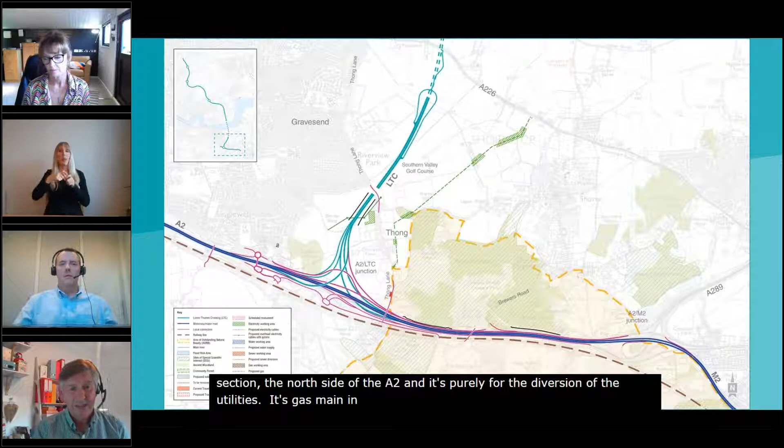We left the trees in, although the land take was 65 meters. So I think that's most probably what this is about, so in this current consultation we're showing trees being removed along the north section, the north side of the A2, purely for the diversion of utilities - a gas main in particular, a very large gas main. It's about a 36-inch gas main, I think 914 millimeters, a substantial gas main which currently runs underneath the road. We've had to move it due to new legislation - you've got to keep it out of the road, so it has nowhere else to go but that area.

Another question has come in about smart motorways, about which we've all read a lot recently. The question is, with the risk that smart road technology holds, why have we not considered hard shoulders? I don't know if either of you is able to comment on that.

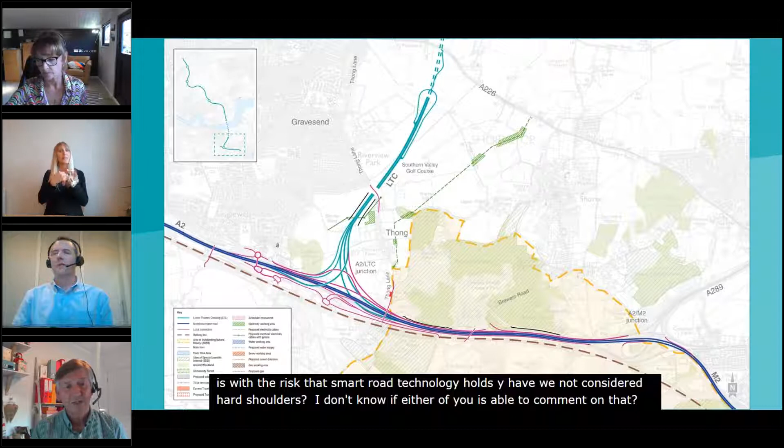I can take this one. It's not a motorway, so we don't need hard shoulders. It's an all-purpose trunk road designed to the latest standard, GD300, so it will have technology and emergency areas, and we are looking at the spacing. They comply with the standard at the moment, but if after the stock take that the government recently did there's a change, we will look at meeting the new requirements. It's an all-purpose trunk road with technology built to the latest design standards, and it will be safe - I think that's the important thing to remember.

This isn't a motorway, as Gary says. It is an all-purpose trunk road, and as technology continues to evolve and design standards continue to evolve, it will be built in line with those latest standards. Thank you for clarifying that - I know it's a very complex area.

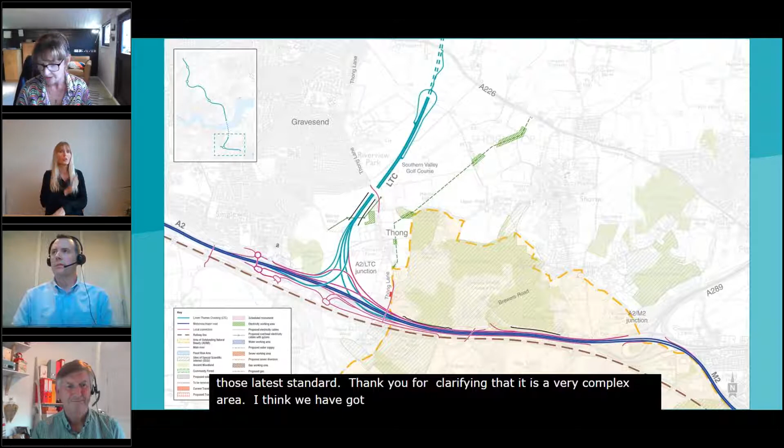So I think we've got time for just one more question, about the charging regime, which we touched on briefly earlier: will the local residents discount scheme apply to both crossings, Dartford and the Lower Thames Crossing, or just to the Lower Thames Crossing? Are either one of you able to provide any information on that, or shall I offer my best guess? I don't know the answer to that one, actually.

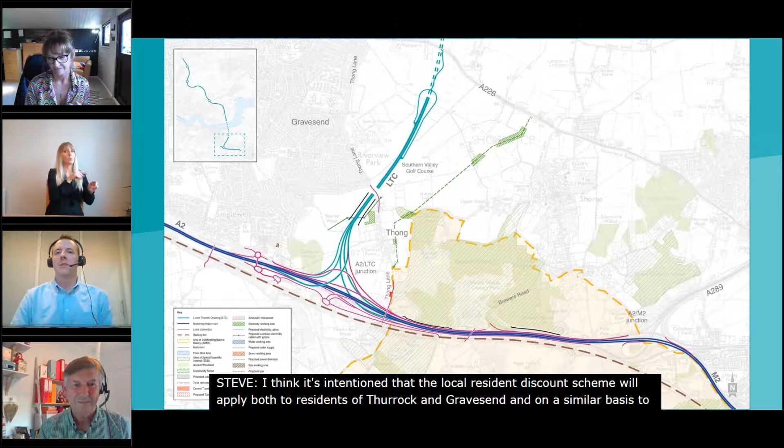What about you, Steve? I think the intention is that the local resident discount scheme will apply both to residents of Thurrock and Gravesend, and on a similar basis to Dartford. So I believe both schemes will benefit from that. Perhaps we ought to seek further clarification, but yeah, I believe that is the case. Yeah, I think that's right. Some of the detail on this is perhaps still to be worked out, but we're continuing to keep that thought front of mind. I think that's about all we have time for.